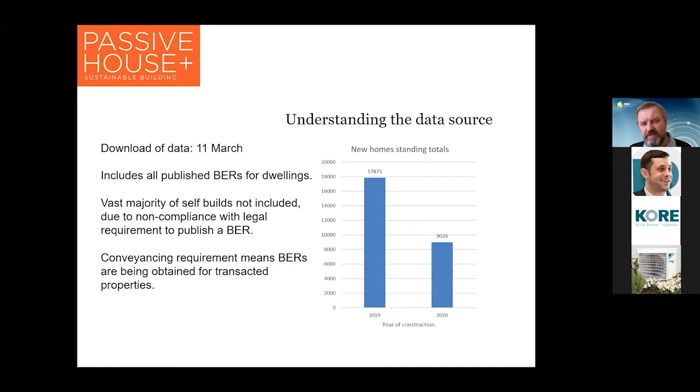This graph here shows the BERs in each year of construction divided by the month the BER was published. And if you look, there's 26 months in total listed on this - I couldn't put the actual names of the months on it because of the way this analysis works.

We've got 26 months that have happened since the start of 2019, that's why that graph is longer. Then you've got 14 months since the start of 2020, and you can see similar curves there.

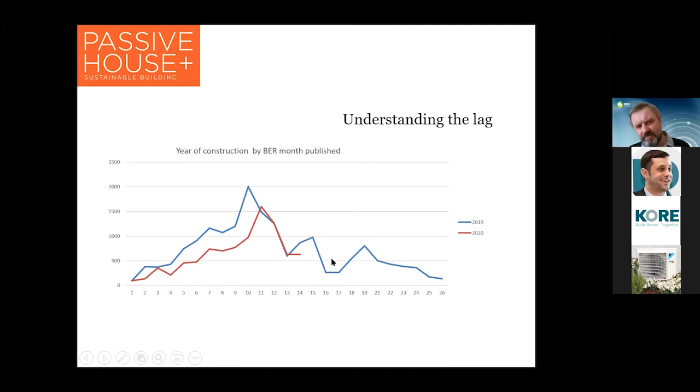You can see here, this is month 16, and 15 through 17 are when the first lockdown happened for the 2019 homes, homes built in 2019. BERs were not being published for them in the first few months, March through May of last year, because of the lockdown. By comparison, this was the same data for the previous year, so very similar curves, but without the pronounced drop from the lockdown.

If we look at the actual substantive energy-wise stuff, the first thing is the primary energy targets as it stands for 2019 TGD L homes. From here on, we look at 2011 TGD L homes versus 2019 TGD L, in other words the nZEB regulation homes. This is specifically looking at homes where the BERs are published over 2019, 2020, and the first couple months of this year.

We've gone from 50 kilowatt hours per square meter per annum, 50.06 on average for homes built to the 2011 Part L, to 40.8 for the nZEB. That's under what the department had indicated was likely to be the nZEB target, based on what the EPC minimum compliant or maximum compliant EPC of 0.30 would likely translate to in primary energy terms, which was 45.

But we can't say absolutely, it depends on the mix of housing. The size in particular is a factor, and we've seen homes in the low 30s needed as the target for compliance with nZEB, and in some cases homes up to 60 kilowatt hours. It really depends on the size and shape of the house.

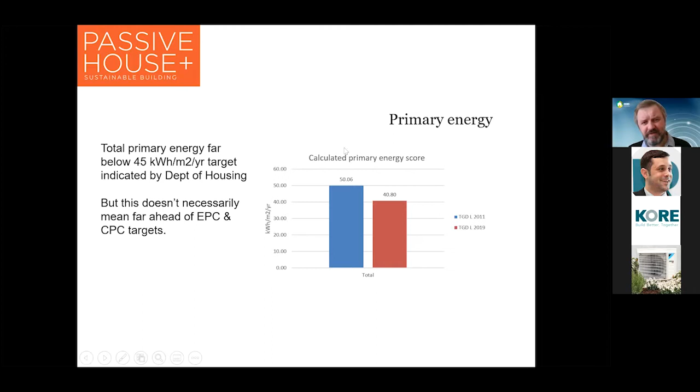By BER bands, you can see nearly everything is A2 now. I'll whistle through these to not take too much of your time, but we're just under 93% A2, up from 47% A2 last year. Still comparatively little movement in terms of A1s, and you get the odd outlier - there's maybe one or two homes that are E2 rated this year, so that looks like a data input issue, which is one of the issues you get with BER data.

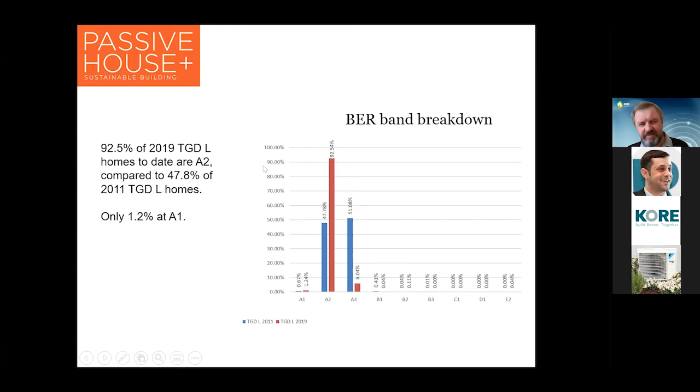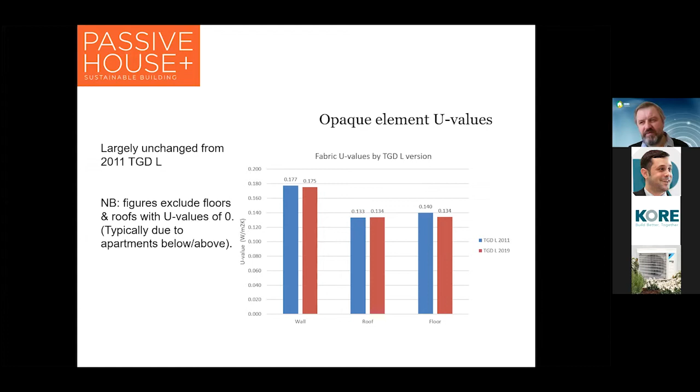When we get into the actual opaque elements, the U values for walls, roofs, and floors, they're basically largely unchanged. Floors show some signs of early improvement, but other than that walls and roofs are basically identical to where they were for homes built to the previous version of the regs. I've excluded floors and roofs where there was a U value input of 0, which would indicate a floor or ceiling between two apartments, for instance, in the same building.

With windows and doors, there is more sign of improvement, from 1.2 on average to 1.16 for windows, and 1.3 down to 1.15 with doors.

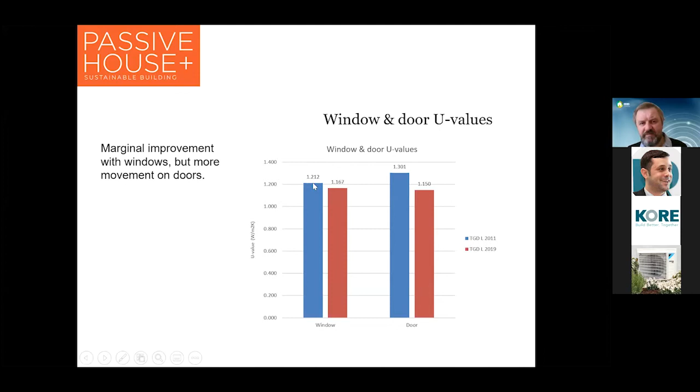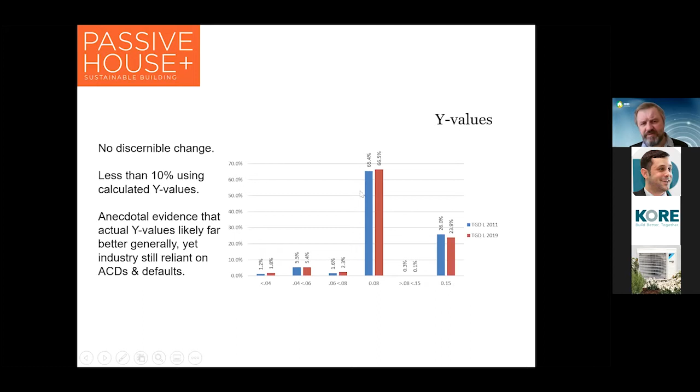With regard to Y values, there's no discernible change, and the industry really isn't engaging in this regard. We're in and around two-thirds of new homes using a Y value of 0.08, and less than 10% actually bothering to calculate the Y values, which may be a missed opportunity from a cost perspective, you'd have to say. Then you have, in the region of a quarter, using the default of 0.15.

Air tightness wise, there have been some improvements, 2.83 down to 2.55. It's good progress, still a long way off best practice and the kind of levels you can achieve with Passive House, for instance. But to put it in context, we've gone from 11.8, the average from an admittedly small sample size from the Energy Performance Survey of Irish Housing from 2005, down to more than 4 times lower than that now. So the industry does need, I think, a bit of recognition for that improvement. Still some work to do, I would say, but it's pleasing to see that.

Then I've divided them up by air tightness bands, and you'll see that the majority, 60%, are below 3, and 20% are in this 3 to 5 range.

There was missing data from the BER database for 13.9%. That's an issue that SEAI are working on updating. The data is still included in the BERs, it's just not transferring over to the national BER research tool.

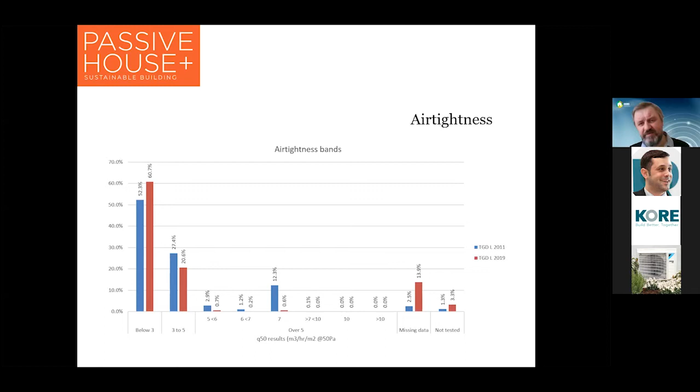So that's an issue. And then there's a small issue of apparent non-compliance of 3.3% of the nZEBs. That, in part, I believe from talking to SCAI about this, appears to be down to people mistakenly using the 2019 TGD L instead when they should have been using the 2011 TGD L. There's a little bit of an issue with data input.

Wall types - there's a health warning required for this because I gather this is not one of the fields that is auditable for BER assessors, so there's not as much attention placed on it. But you can see what's evident from this data, and I've aggregated a few of the different wall types into different groups here. The names in the actual research tool are curious, like 225 mil solid brick, for instance, or 325 mil solid brick, which don't really correspond to anything we'd really see out there. I think that's meant to be single leaf block with external insulation.

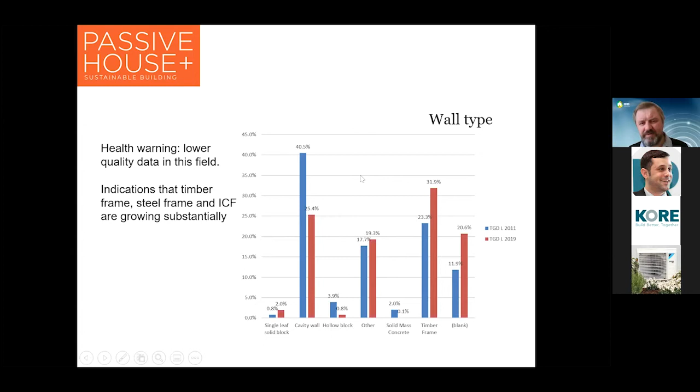What you'll see here though is that timber frame is growing substantially, over 30% from the early signs data on nZEB. And what isn't evident here, but is visible in a narrative field associated with this wall type category, is that categories which SCAI didn't include when they were developing the system in DEAP, such as ICF and steel frame, are being added in the narrative field, and they're growing quite nicely. They'd be evident in the other fields and in the blank field, along with a lot of other walls - cavity wall types come in there as well. It's a bit of a mishmash, to be honest, and lots of assessors don't input information into the narrative field.

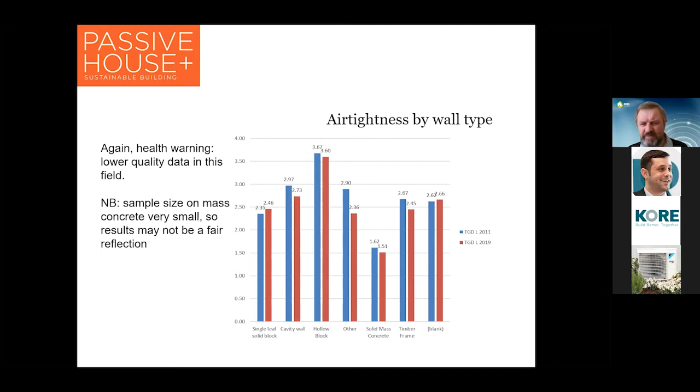When we look at air tightness by wall type, again the same health warnings apply for the reasons just described, but a lot coalesce around about 2.5 total, with hollow block substantially worse, and solid mass concrete much better. But with the solid mass concrete figures, the sample sizes for that category were particularly small, so I wouldn't necessarily read too much into it.

Ventilation-wise, there's been a profound collapse in the natural ventilation market, which I'm unashamedly happy to see, because we believe very strongly that natural ventilation without some form of mechanical fail-safe backup is not fit for purpose for low energy buildings.

But what is apparent is that MEV is becoming dominant, and we also see one thing that I just corrected with SCAI this morning - there was a bunch of missing data which corresponds with this field on the right, exhaust air heat pumps.

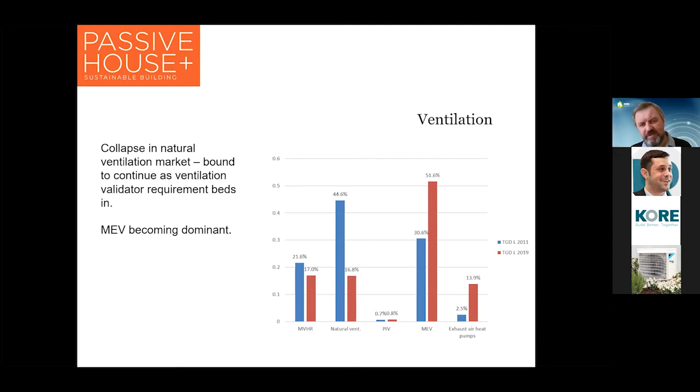The growth of exhaust air heat pumps is not from 2.5% to 13.9%. We can't say that. There was a change in DEAP when DEAP 4 was introduced, which affected how exhaust air heat pumps are inputted, and consequently it was coming down as missing data in newer BERs published last year and this year. So that's indicative of that growth there.

And then in terms of heating systems, one of the big headlines, I suppose, is this profound change that we've had. Heat pumps are almost the only thing that's happening in new homes in Ireland - 93% of new homes. Oil, by comparison, for a country where half of the housing stock or more was on oil historically, is at 0.2%, doesn't even show up on the line here of homes built this year.

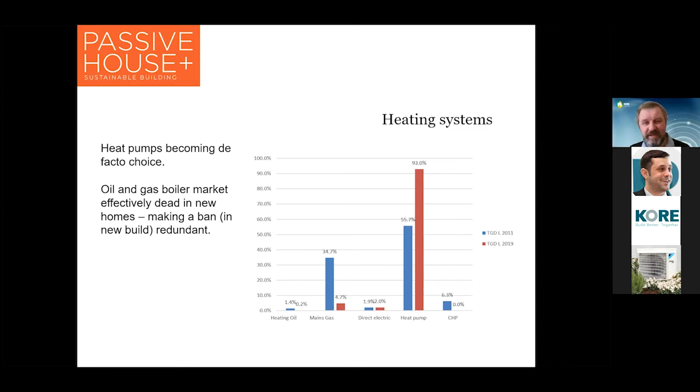Homes built to the new Part L don't have oil boilers, so it's extraordinary to see. It's gotten to the point where, at least in the context of new builds, the government doesn't even need to ban it, because it's dead already. And that really concludes that presentation. Thank you very much for listening.

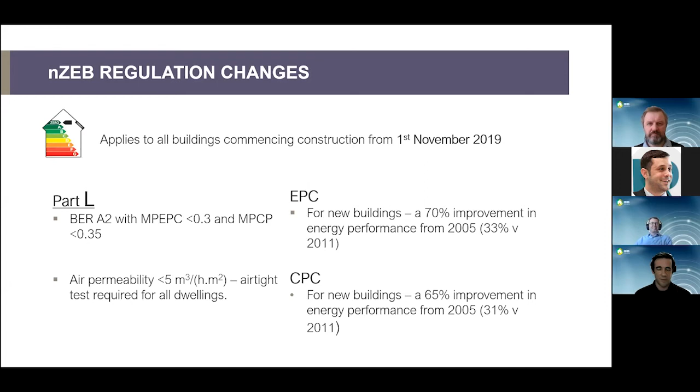For air tightness, we need to be below 5, and if we're below 3, we need a mechanical ventilation system to comply with regulations. It's lovely to see, as Jeff pointed out, that natural ventilation is dying, thankfully, not just from a sales point of view. I agree with Jeff and most stakeholders that mechanical ventilation is generally a safer approach for occupants. There are a few things in Part L—the renewable energy contribution is based on energy demand, and the U-values have also changed slightly.

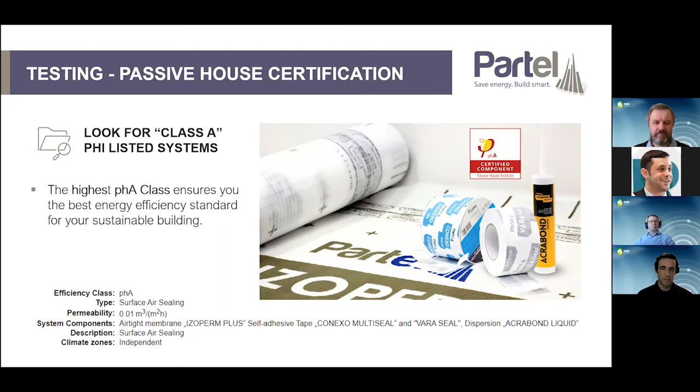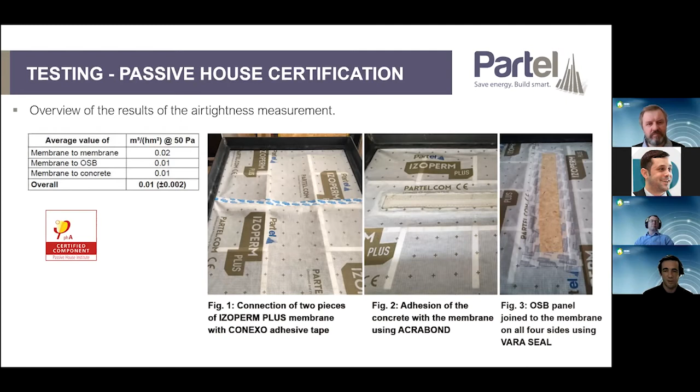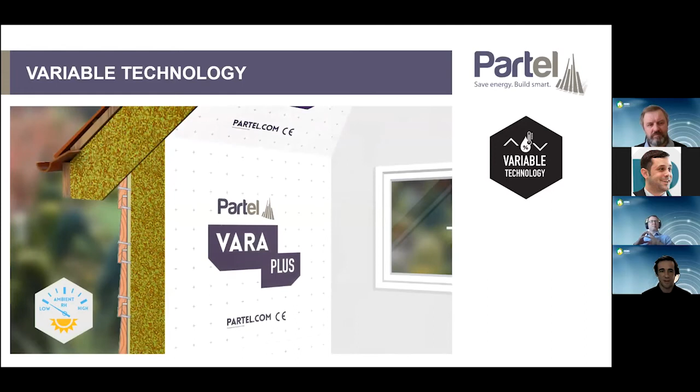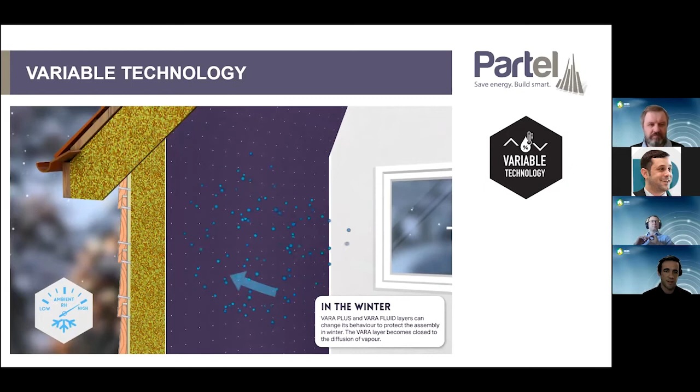This is a nice slide to help explain one of the misunderstood products on the market: variable technology, or smart, intelligent systems. This is the VARA FLUID product, and it shows that in summertime the membrane can open and become quite open to facilitate additional drying, while in winter the pores can close to help protect the construction. These types of products are needed in some situations, not all. So definitely reach out and consult, and don't be afraid to ask for WUFI analysis in your build-up.

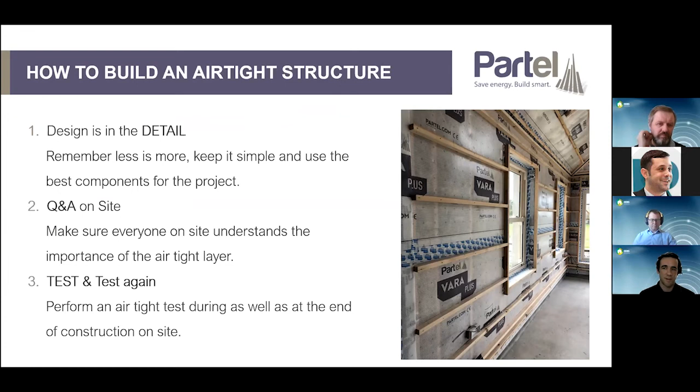How do we get airtight? It's a three-part process: design in the detail, so that's the architect; Q&A on site; and the two-part testing system—testing when membranes are exactly at the stage you see in the photo, and a final test on completion. We focused previously on wind tightness.

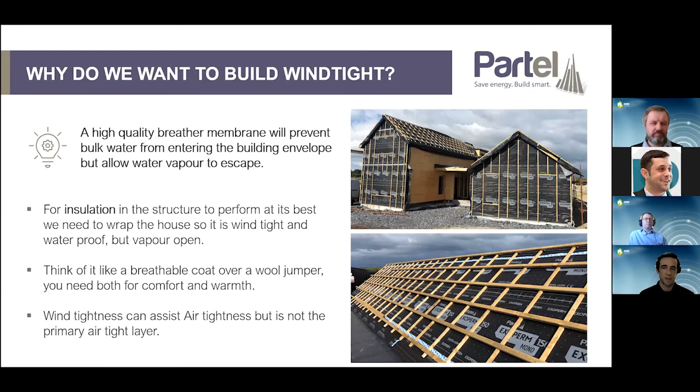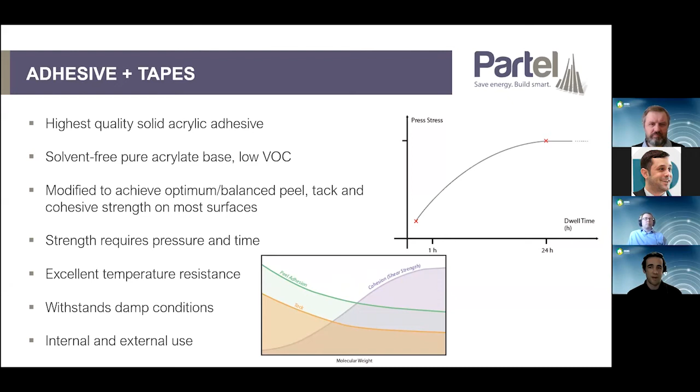It's an area I feel equally strongly about, for a couple of reasons. One, it helps improve the final, actual achieved U-values. Secondly, the quality of the products matters a great deal—there's a huge variance there, and we're trying to educate people on how products are produced and how to see the differences between them. We also looked at airtightness tapes, and similarly, the quality of the tape matters to how the overall system works. There are a lot of decisions and choices you can make. We showed the ideal, balanced adhesion we look for—it's not all about the peel or the initial tack, it's more about the final, long-term strength of the tapes.

And lastly, we looked at thermal bridging. This is a structural thermal bridging installation. Jeff, really interesting to see that people are kind of ignoring thermal bridging. I'm hoping if we continue talking about that, for more than one reason, there'll be some improvements. I actually think it impacts dramatically on BERs, and there's real savings together with the better quality building that people can achieve by focusing on that. I think that's me for now, Jeff, so I will hand back to you.

Thanks very much, Hugh. Yeah, the thermal bridging issue is a significant one, and it's a missed opportunity. And you rightly point out it's one of the issues that can impact on the robustness of the building from a condensation, damp and mold perspective as well. So evidence-based approaches address those kinds of matters, and that's something we need to see the industry engaging on more. I should say that we do feel there's a lot of people out there building to much better details than they're inputting into DEAP. And therefore, using either a 0.08 or a 0.15 when the reality may be far better.

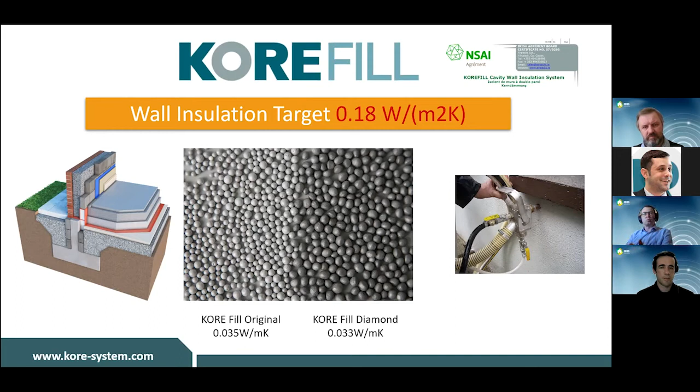So we started looking at the wall solutions, and we looked at bonded bead and how that works very well for new build and retrofit - certainly from the new build end of things, in terms of speed, buildability, cost savings, reducing thermal looping, and issues with skilled labor shortages on site - how that's a very viable solution. As part of all our products, we have typical details, and I would have shown these at the time, the thermal bridging. This kind of ties into the Y value, like Jeff and Hugh would have mentioned. We have these thermal model details - there's only a certain number of people in the country qualified with the NSAI to issue these details.

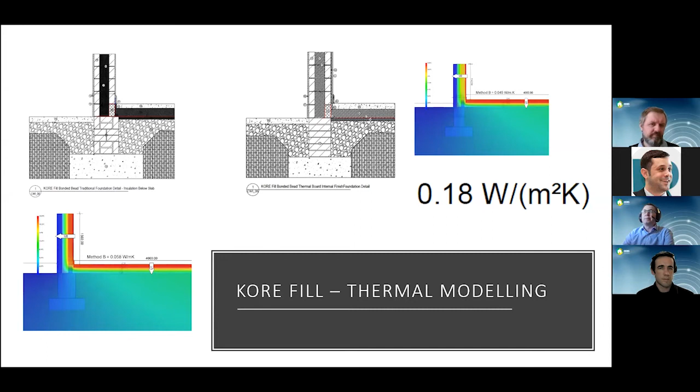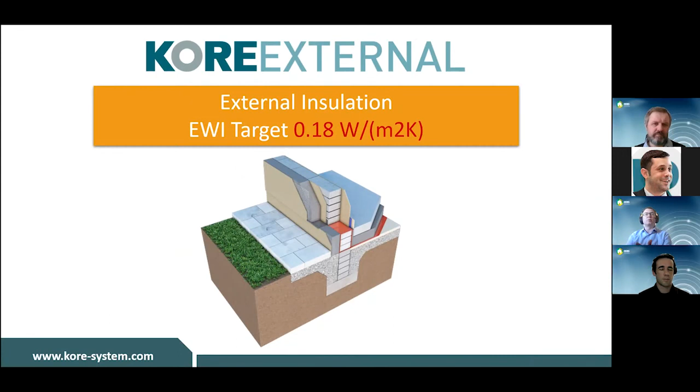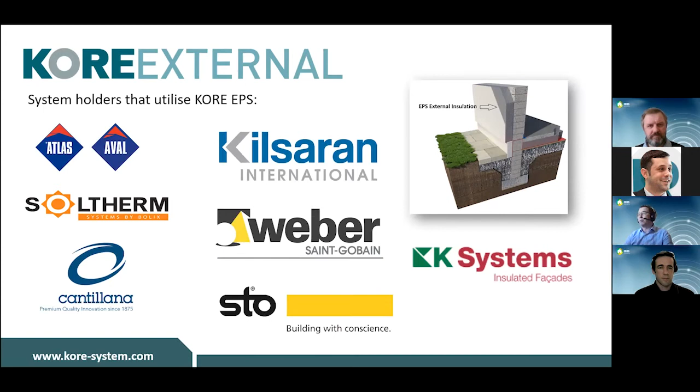Very, very usable on retrofit and new build situations. Again, because it's an EPS product, we can save money potentially on a project by using something from our range of KORE solutions in this regard. So that was our external insulation.

We have various different types of boards available depending on the project, different densities, different thermal performances. We should be able to assist whether it's domestic or commercial. Again, because it's an EPS product, when you use it at the start of your project, in 50 years, 100 years down the line, physically and thermally, it's doing exactly the same thing.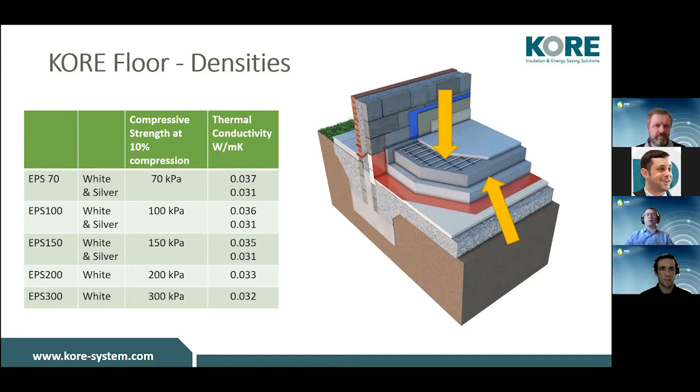So there's great confidence using an EPS product. The one thing that was a bit different, looking at our insulated foundation system, was a very simple way of reducing thermal bridging and getting compliance with Part L. We use an insulated foundation system and see a U-value in the floor around 0.1 by default, blitzing any requirements of Part L and nZEB, all those new regs.

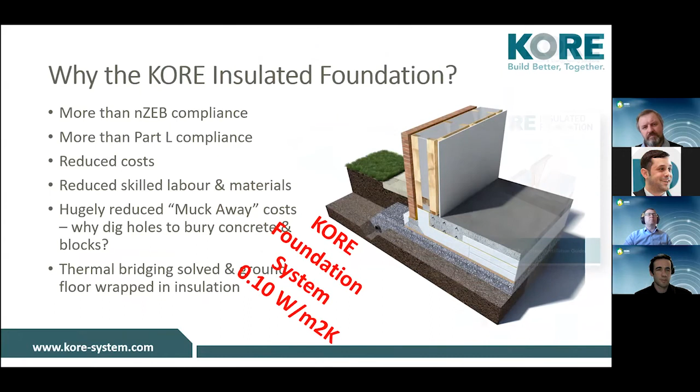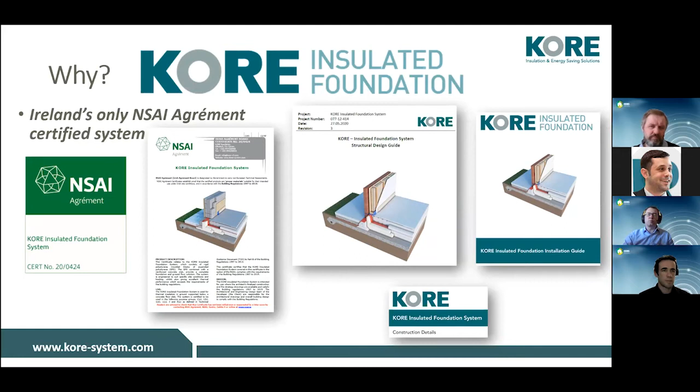Again, if we use clever thermal modeling and our details at the perimeter, we can get cost savings in our builds very simply by using a system like this. It's not going to cost you any more on a project by using a foundation system. I went through the ideas behind it and how we gained our NSAI Agrément certification, which made us fairly unique in the industry, being Ireland's only certified insulated foundation system. So we have a lot of backup information for structural engineers, architects, you name it.

Just touching on our sustainability, EPS as a product is recyclable, which is great news. When we look at a bonded bead, you only pay for the material that's used. We're not sending boards to landfill. EPS can be recycled.

To quote some fantastic information in Passive House Plus magazine, there was a study looking at embodied carbon, comparing an insulated foundation system versus traditional builds and how we can save on the amount of concrete and embodied carbon. The last thing from our sustainability point of view is that we're the first board manufacturer in the country to have an EPD, so all that information is out there available for people.

The last thing is just our technical backup and what we can do for people in the industry. No matter what place you are in the industry, whether you're a designer or a builder, reach out to us and feel free to get in touch. We're always happy to help you. And that was me.

Thanks very much, Andrew. Very, very informative. And I'm delighted that you mentioned EPDs and the life cycle assessment end of things. That's the next big target for the industry.

In fact, it's something we should all be considering for a future seminar series. Thankfully, the partner companies involved in this event all, in their various ways, from the digging we've been doing into this, have products and solutions that can assist in that regard.

Whether it's Core getting an EPD and showing substantial embodied carbon reductions with a passive slab foundation system compared to conventional foundations, whether it's Partel with the recycled plastic thermal breaks, whether it's Daikin with the new refrigerants they developed to reduce the global warming potential of their units, whether it's NorDan with the 60-year design life on their timber alu-clad windows, and then also with Harmony Timber, timber frame tends to fare extraordinarily well, especially compared with the likes of a cement board rather than a block or brick externally.

Our next speaker is the indefatigable John McMenamy, the technical manager of NorDan Vindeur. John will approach the topic related to window solutions to achieve the nZEB standard. He's worked in the construction industry for 35 years, starting as a carpenter with a focus on timber frame construction and offsite modular buildings. He joined NorDan in 2004, including a spell with NorDan UK looking after their certification and testing. He's been involved since then with the specification and installation of windows and doors for large housing developments and one-off houses. I've personally benefited from time to time from his honest broker, very technical approach to understanding the subject, and I'm looking forward to hearing what he has to say.

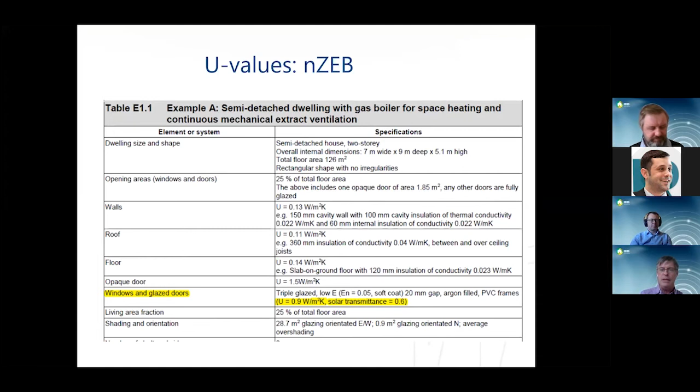Now, the only thing perhaps in terms of that U value and G value, we would have a slight concern that overheating might be a risk, and it's something to be cognizant of. If you've got very airtight buildings with high G values and large amounts of south-facing glass, it will get pretty warm inside. So we would expect those values to come down, particularly on south-facing elevations.

Now then, the window is multifunctional, it has to do an awful lot. I gave a quick list of things it had to do in the previous presentation, I'll just run through it again briefly. There was one important bit I left out: provide sufficient daylighting, allow visual contact with the surroundings, keep heat in, keep heat out in the summer, ensure good weather protection, allow controllable ventilation, keep out excessive noise, ensure safety, stop people falling out.

Now, on top of all that, the window and the door is pretty much the only thing in the building fabric that is designed to move. If anything else is moving, you've got problems. So not only do we have to make sure the thing is very efficient in terms of air tightness and energy performance, it also has to be physically very robust.

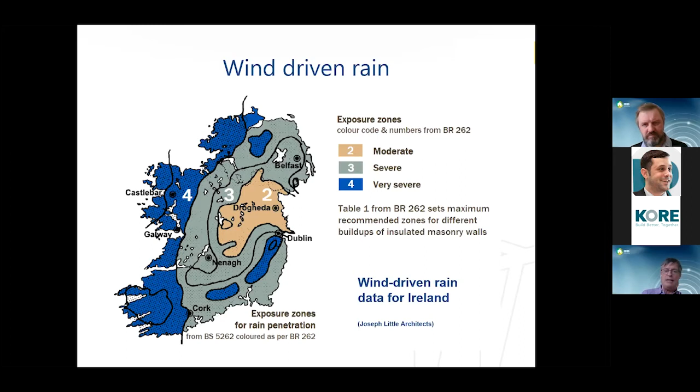So perhaps the big issue we would have here in terms of windows suitable for this country and, say, Central European climates is the frequency and intensity of wind-driven rain. This map shows two data sets between precipitation and average wind speeds. You'll see that most of the island is either severe or very severe wind-driven rain, so buildings, windows in particular, have to be designed and installed to accommodate that.

Now, this particular book I mentioned in the presentation, printed and provided by Trada, Wood Windows: Designing for High Performance - not necessarily just for timber windows - it's very good general reading about windows and window specifications for anybody involved in specification and construction design.

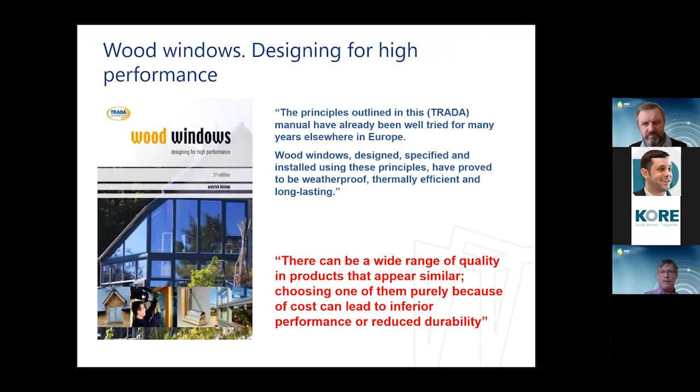Now, some of the parts of it I didn't touch on in the first presentation: it's important that designers of windows determine the required level of weather resistance. It is not sufficient merely to quote compliance with BS 6375, and that goes for a lot of things - we would see that in specifications, just a standard quoted without any classification to that standard.

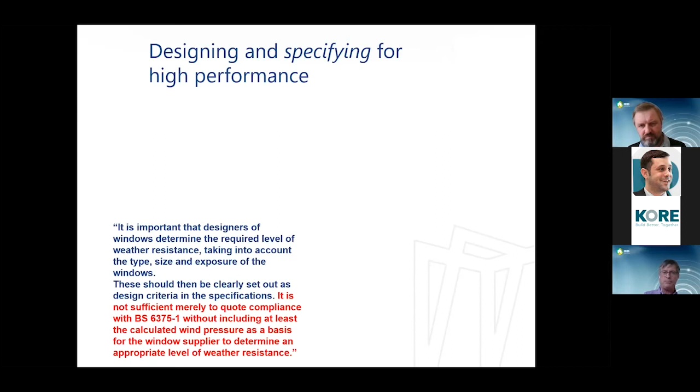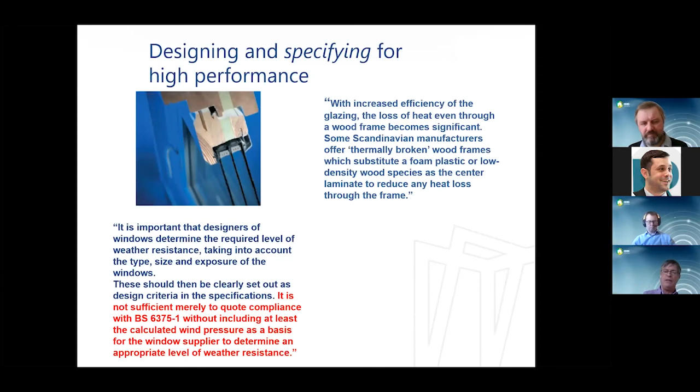Another thing to look at is the use of insulators within the window. We and other window manufacturers can get a standard window down to about 0.8. If you want to go any lower, you're starting to put thermal breaks in the window, so it depends what sort of U values you want to get to. We can provide anything from the 0.9 in the worked examples down to 0.7.

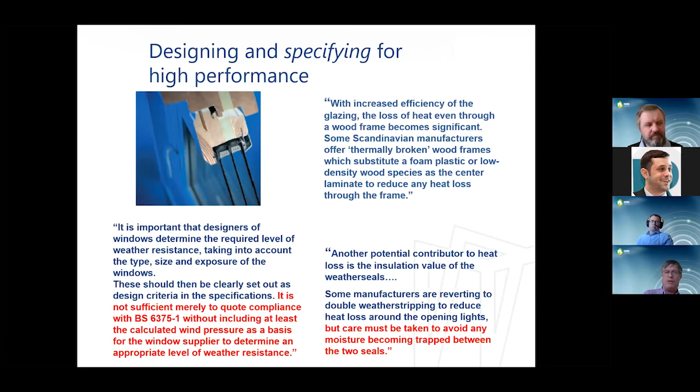Now, another one that crops up in questions to some of my colleagues at work is the number of seals in a window. This design guide by Trada touches on the subject, and you'll note the text says care must be taken to avoid any moisture becoming trapped between the two seals. What does that refer to? Look at these sections here.

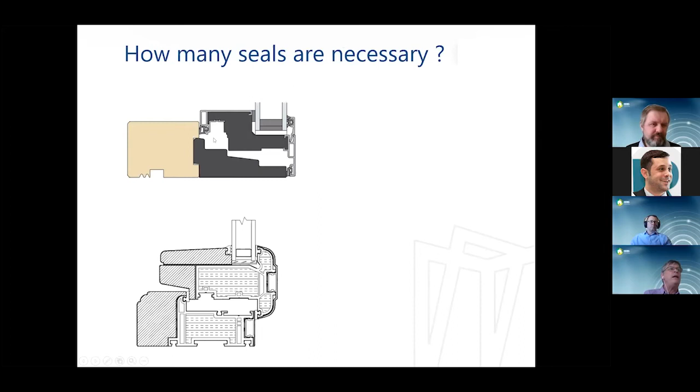We've got two particular window samples. You've got an external seal there and an internal seal there, and the lower one has an external seal on the outside and an internal seal there. That's two seals. You'll get examples now with three different seals.

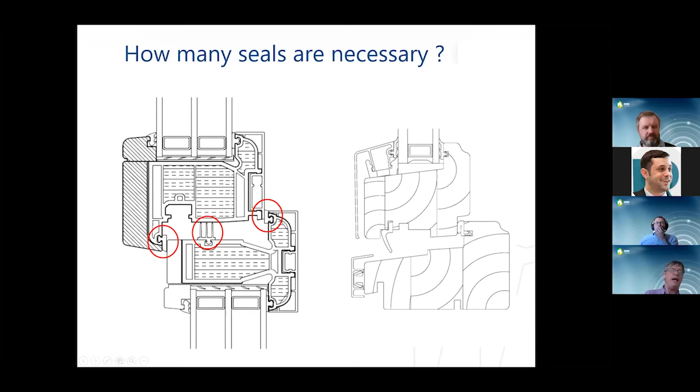This particular window here has only 1 seal. Why is that? The single seal at the back will provide adequate weather protection. With multiple seals, there's a risk of moisture getting past the external seal and getting stuck in that cavity. With continued wind-driven rain from outside still driving water in, there's very little way for it to get out, and it can sometimes get past the inner seal and leak into the building.

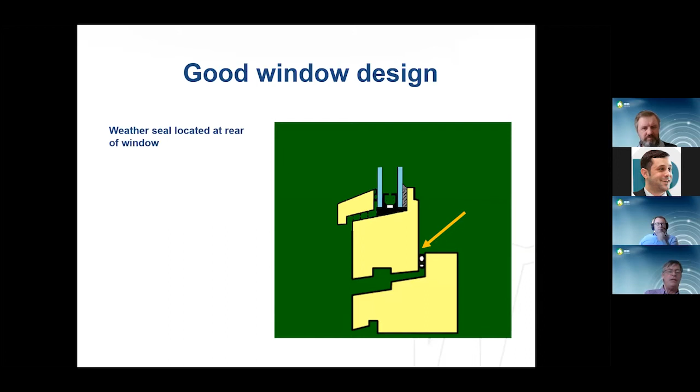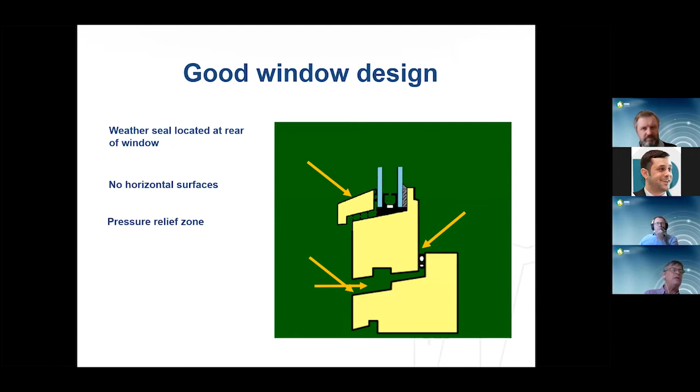This goes back to the principles of good window design as recommended by Trada: locate the seal at the back of the window, avoid horizontal surfaces so there's no place for water to puddle, and include a pressure relief zone to de-energize the wind so there's no energy left to carry water back to the seal.

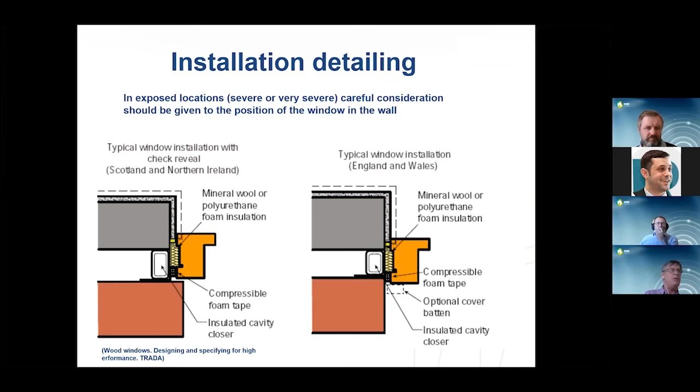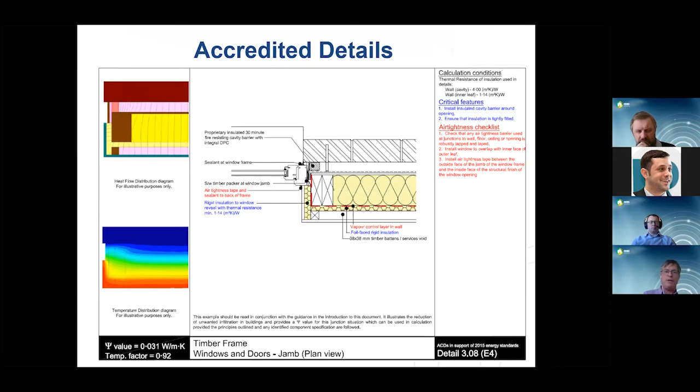The installation details, again touched on earlier by Hugh and Jeff, we have accredited details from Scotland which show the psi value on there. It's all well and good having a particularly well-performing window, but it really has to be installed properly, and all the detailing, not just in terms of weather but the structure, has to be adequate for us to fix the window to.

Lastly, what sort of certification and performance should you be looking for? In summary: third-party certification, performance certification in terms of air permeability, water tightness, security specification, sustainability - PEFC, FSC, environmental product declarations. We have those for a range of our windows and doors. And then again, warranties - what sort of warranty you should be looking for.

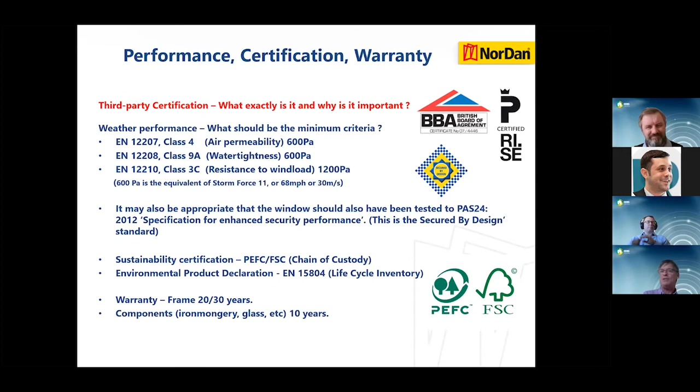Next up, we have a summary from Ian Killoch, heating sales engineer at Daikin, who will round off the topic related to the omnipresent air-to-water heat pumps now found in almost every house in the country. Ian has worked in the renewable energy industry for almost 2 decades, including a spell in solar PV, with a huge passion for climate action and the transition to energy building in general. He's worked on projects internationally, including in Nigeria, Germany, and Sweden. He's dedicated to helping Ireland reach its climate action goals by 2030 and beyond with sustainable construction and living.

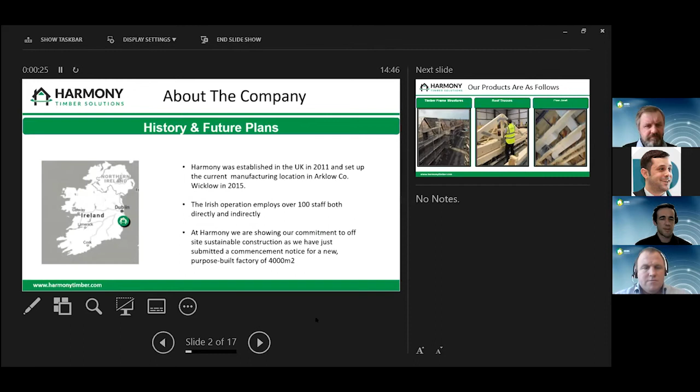Clear now, Hugh? Yeah, perfect.

We were established in the UK in 2011. We started manufacturing back in Ireland in 2015. We've 100 employed directly and indirectly, and commencement notice has gone in, hopefully with COVID, for our new factory.

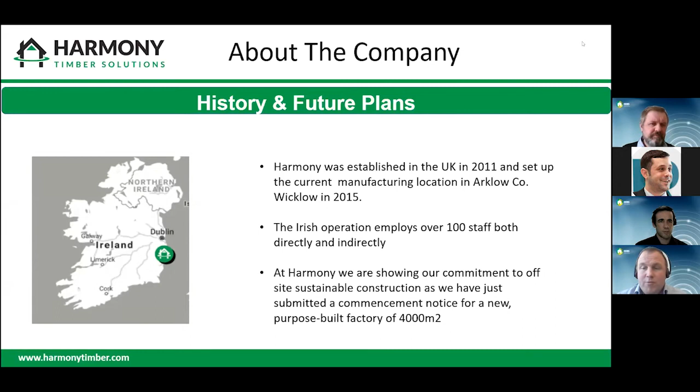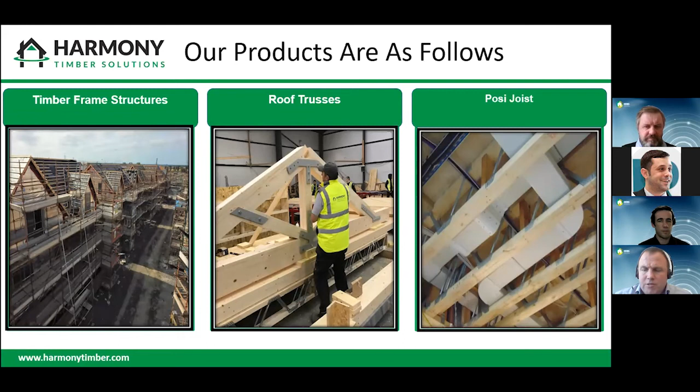What we have on offer with this presentation: our timber frame structures, which will be external walls, internal walls, party walls, our roof trusses, and our posi joists.

So just a quick review, I'm going to run through our walls, floors and roof trusses and how our offering will affect nZEB and any compliance to it.

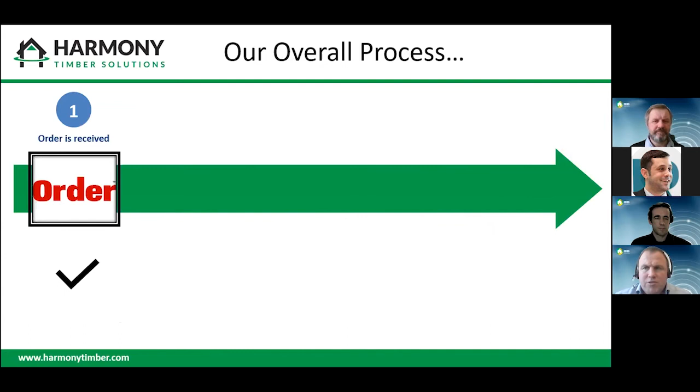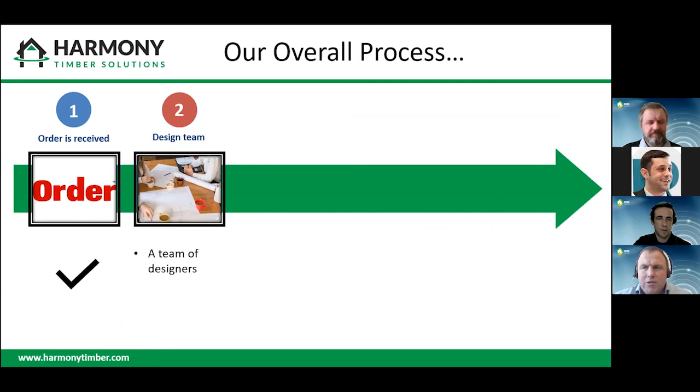First we receive the order. We're highly process driven, so each individual order we get, our client's drawings, we have an experienced team of designers who will go through it. So we'd take a fabric first approach to deal with cold bridging, thermal efficiency, and air tightness.

Our factory environment again is all processes, so it's computer to saw and everything is pre-cut for manufacture. Also our factory is NSAI audited every year, so all our processes of how we design, manufacture, and the incoming material is all strictly audited.

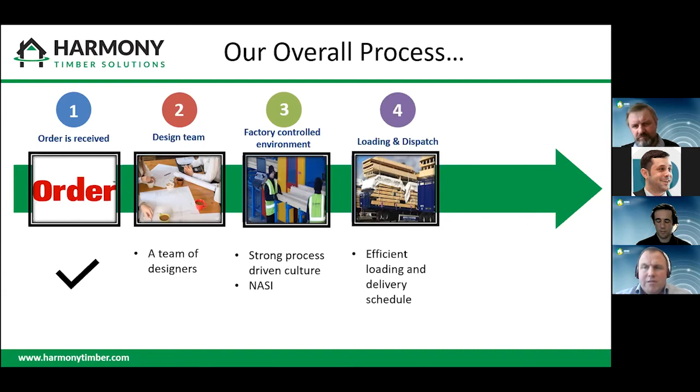Loading and dispatch, we work to critical delivery periods on site, a strict delivery schedule for an on-time approach for everything to be delivered for fitting on site. And on site we've put a team of over 40 involved in different erecting crews for fitting our kits, our roof structures, and our floor metal web floor joists on site.

We have 3 different walls on offer. Our 0.18 would just meet the backstop value. Our 0.14, which is our most common wall, will exceed the minimum regs. And our 0.12 should generally be targeted towards our passive style and one-off houses.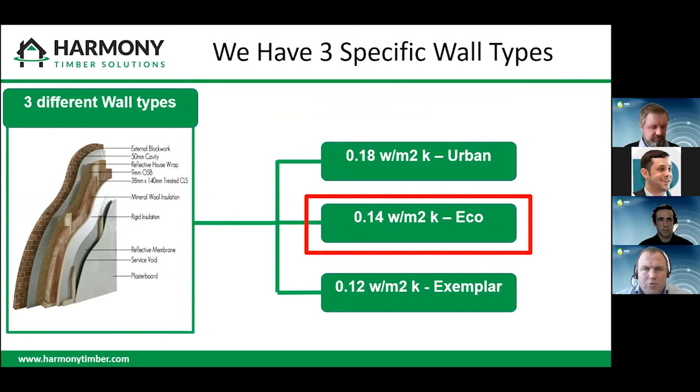I'm going to go through our 0.14 and give you a more detailed approach to it.

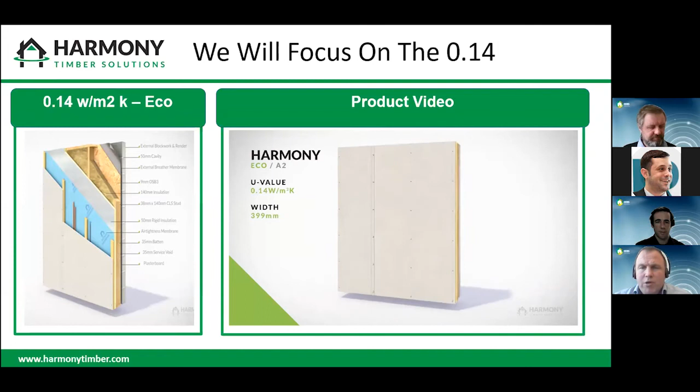And with this, for ease of manufacture and ease of fitting, we also look at structural elements as part of our design.

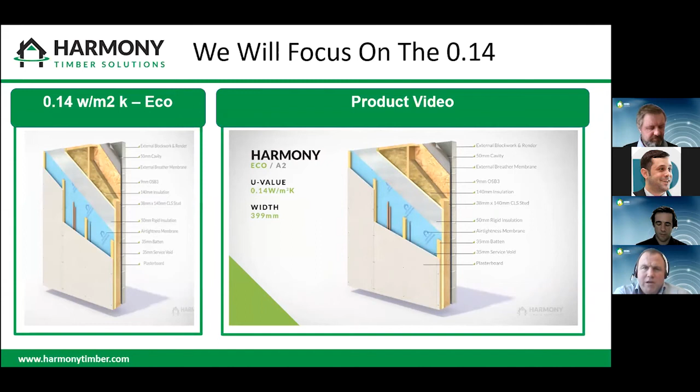Just briefly, we also try to achieve a full thermal break with our 50mm PIR along the face of our wall. This wall will achieve our 0.14, and we fit mineral wool in between the studs.

Some people will ask why we use mineral wool, why we use PIR. We use a range of different materials to get the most cost-effective solution for our client, and also ease of fitting. We also use an external membrane and an internal membrane - foil face membranes, which add to our U value because of the use of emissivity within the air layer.

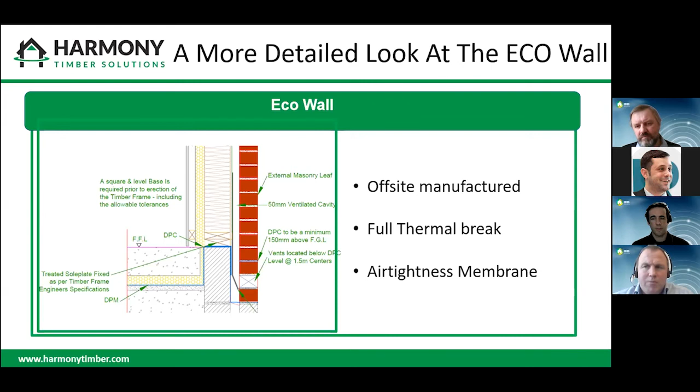Our air tightness complete envelope wrap.

We also fit our OSB with glue and screw it to the joists in the factory, which reduces health and safety issues from working at height.

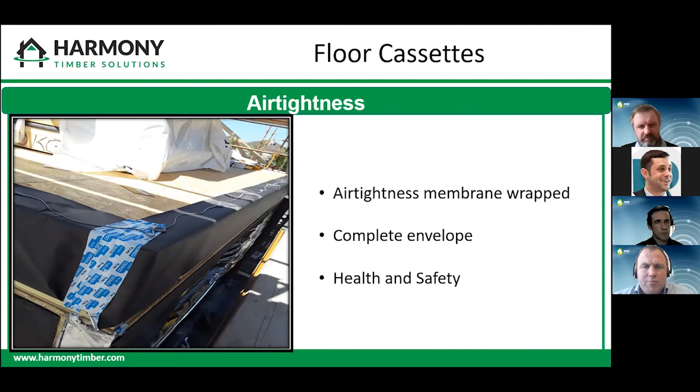We'll also tape and join into our wall membrane, so again we're achieving a full complete wrap. We also fit our service battens to the underside of the roof trusses, so your electrician or any other services can be run in between them with ease.

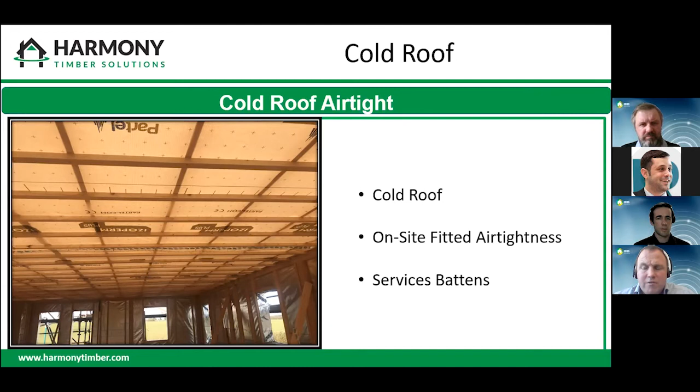And again, if this is a 3-story situation, we have 30-minute fire tests completed to ensure that we comply to EN 1365.

We use pictures which are taken with time and date, so each picture will relate to each house unit and plot number on a site. We also provide on-site access to this app for any of your health and safety personnel on site or the site foreman, so they can check our progress and confirm we're completing all the works as required. This is all relevant for BCAR, for checking and recording all the information, because some of the information we record on site isn't easily accessible for checking again once it's covered up.

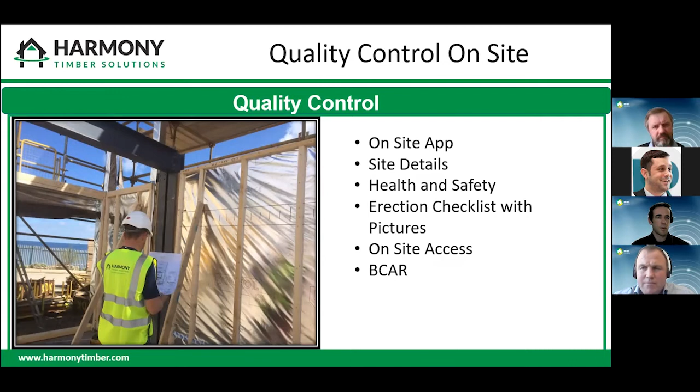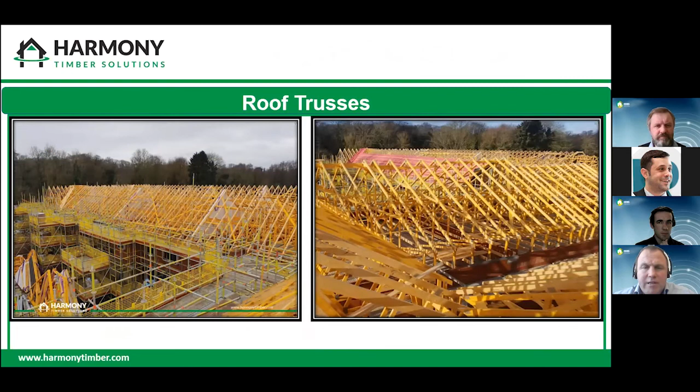Our other products that we supply to the market include roof trusses for traditional build, block, brick, ICF and metal frame as well. We also supply feature trusses with some of our kits and with some of our customers. When we're designing these, we'll also incorporate our air tightness, insulation, and U value requirements, so the person can get the full benefit of the feature truss.

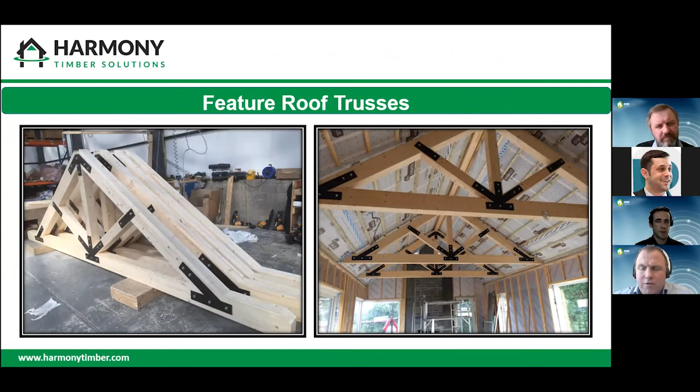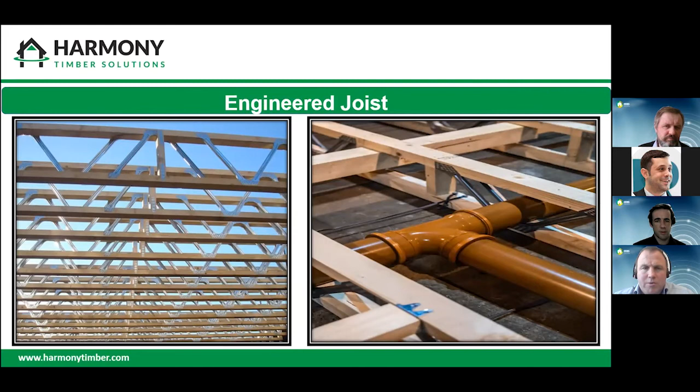Engineered joists, our metal web joists, we supply to traditional build again, block and brick, ICF, and the ease of fitting all the services into these, more and more with mechanical heat ventilation, soil pipes, sewer pipes. They're becoming really a joist of choice at the minute on nearly all sites.

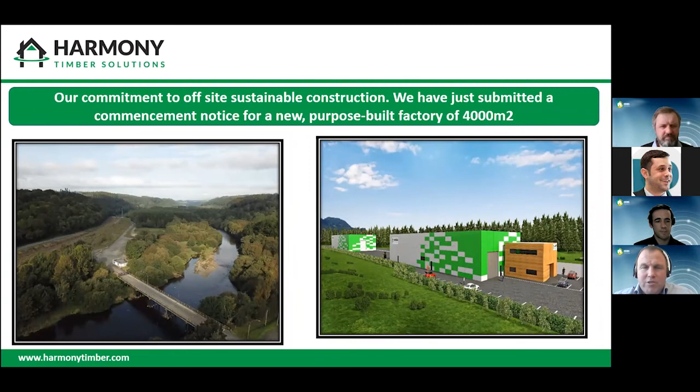And then just our commitment going forward, we have commenced. The commencement notice has gone in for our new factory units, which are located here in Arklow, and we have a forestry setting, so it's in par with what we're passionate about. So that's me. Thank you very much, Jeff.